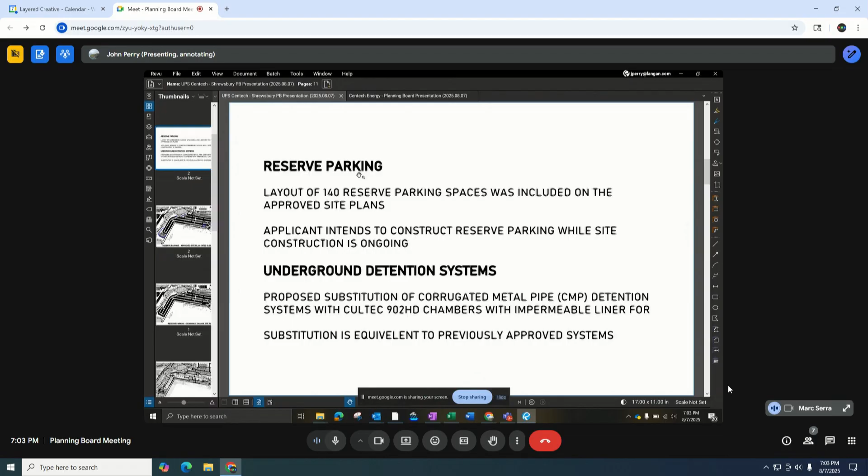If you recall, in the approved drawings from last October, dated October 25th, 2024, which are the approved drawings on record with the decision for the project, there were 140 total reserve parking spaces shown on the site plans. This is the employee parking for the site. We were originally proposing to construct 830 parking spaces, and we had 140 in reserve overall.

I don't have the breakout of what's just in Shrewsbury versus what's just in Grafton here, but shown here in blue is what we had in reserve, 140 total spaces. We're requesting to go ahead and build those now with the construction project that's occurring. There was at one point a plan to maybe just build those in the future, realizing that's going to be a lot more challenging once we have an occupied site with actual employees on site every day driving around the parking facility. So we're requesting to build those now.

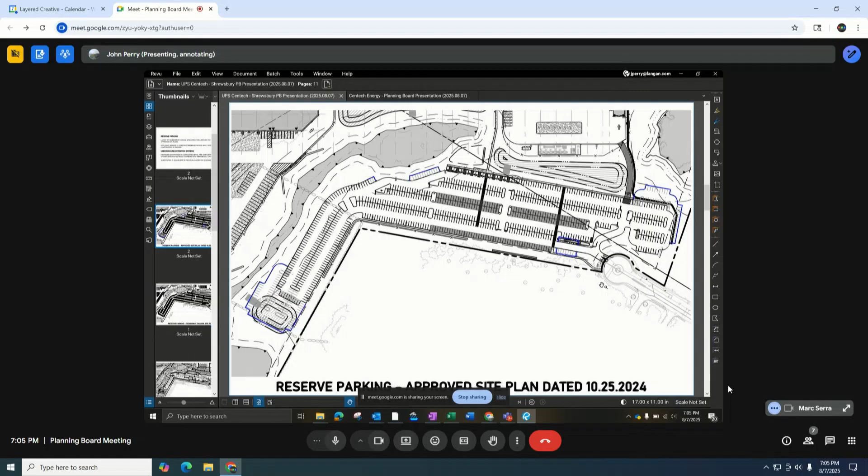Essentially what we've submitted is just the engineered drawings for this. As with our original submission, it was just the site layout for the reserve parking, not the final grading and construction detail. So on this next page here, that is the finalized site layout plan for the reserve parking. Really, in Shrewsbury, it's just these few in the top right corner here. There's a small retaining wall that we'll be installing based on the grading and everything.

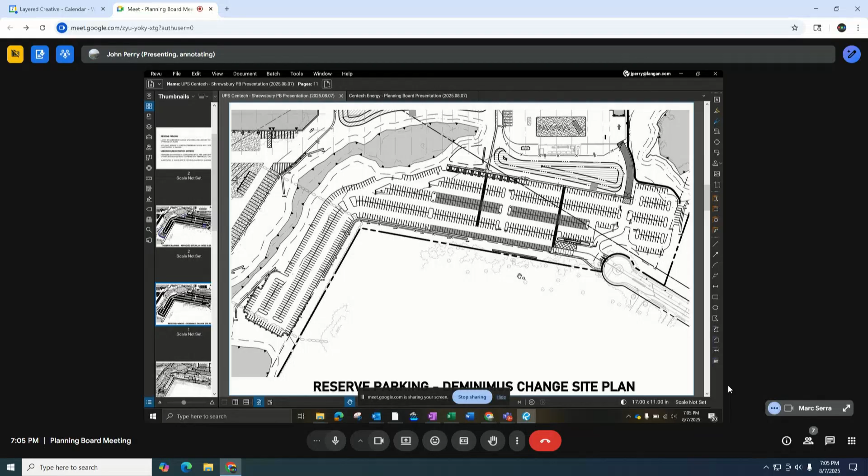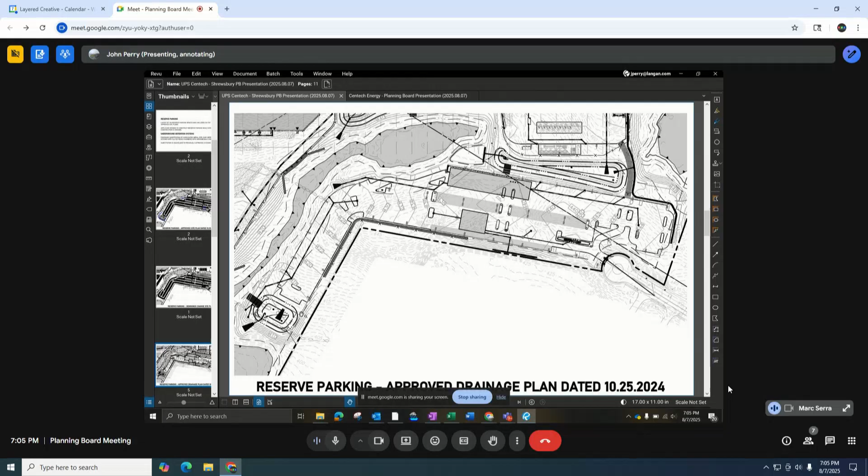Just to complete the picture here, and this is more Grafton, so more for context, in the southern portion we had a surface basin for stormwater. Now that we have parking over it, we're going underground with that detention or infiltration volume. That was all planned out in the original stormwater submission, reviewed and approved by Graves. Again, this is just the final detail for it. All of the impervious area was accounted for in our original design and stormwater plan, so there's really no change, just wanted to present this.

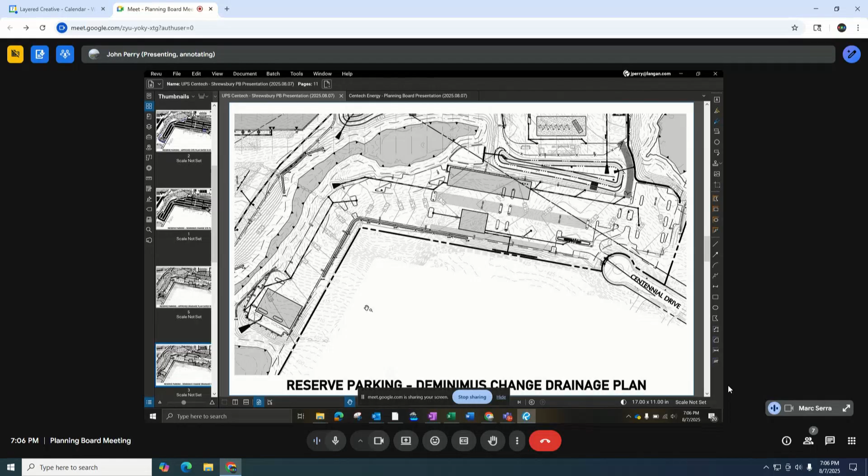I kind of refer to them as an updated plan set, essentially. The next thing is, this is obviously the warehouse area of the site.

We had 2 underground stormwater detention systems on the approved drawings, shown here in blue. Those were proposed to be 6-foot diameter solid wall pipe systems. They're not for infiltration, they're just to detain stormwater, to hold it back and slowly release it.

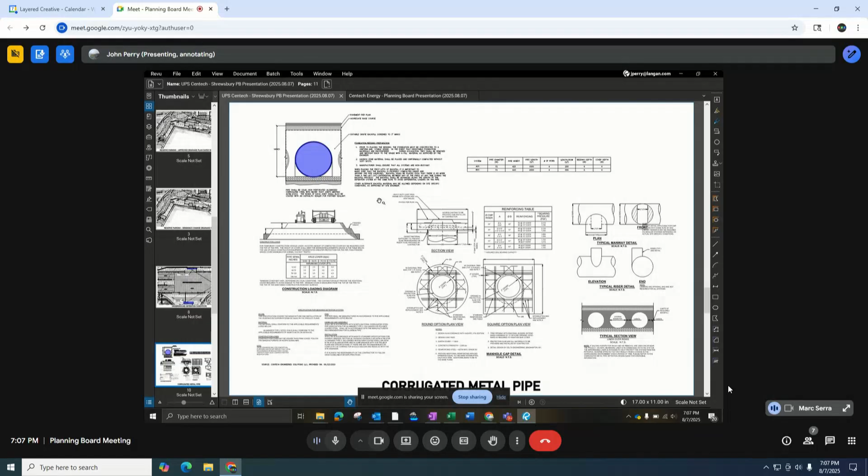What the contractor has proposed is just a slight variation of that. We're still proposing the exact same location, essentially the exact same volume, which will function the same way. It's just a different product. So this is what was detailed in our approved submission, just that 6-foot diameter solid wall pipe system, and this is the product that we are intending to use.

It is Cultec chambers. Apparently it's a little easier to procure, a little easier for them to install. I think they'll go a little quicker as well. Usually these are designed to infiltrate, but we don't want to infiltrate, so we're going to put a liner, a PVC membrane on the bottom, the sides, and over the top. So it's a completely wrapped impermeable system, so we can hold water in there.

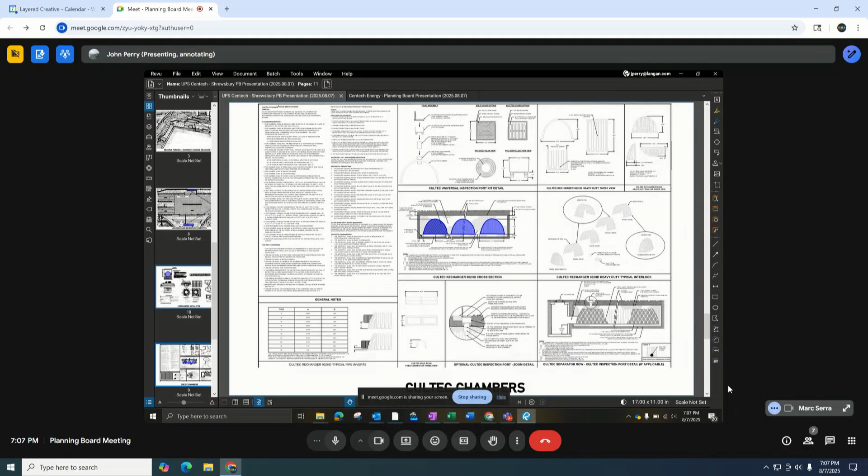Again, we've modeled it, rerun all of the stormwater calculations, and have proven that it's an equivalent system.

Is it equivalent for maintenance purposes as well? Do you think there'll be more maintenance, less maintenance, or the same for this system? There shouldn't be a whole lot of maintenance needed, because we're cleaning the stormwater well before it gets in there, but there will still be inspection ports and ports to vacuum or jet wash the units if needed.

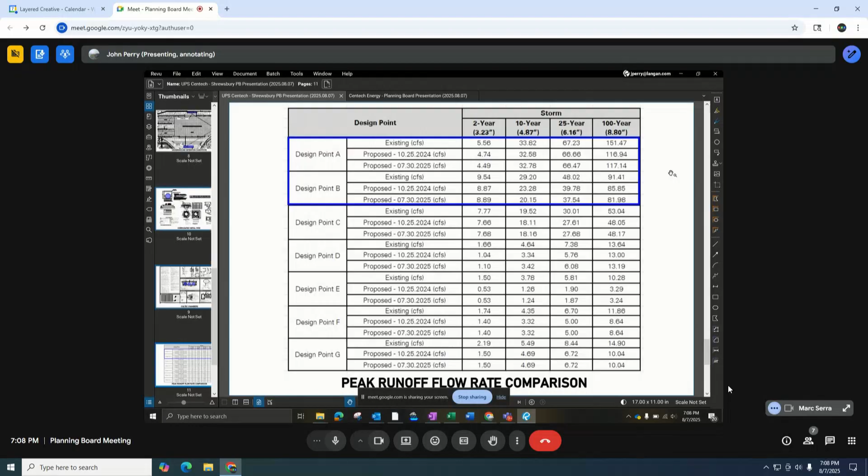Any board member questions or comments on these changes? Sure, quick question. So these 6-foot diameter pipes or storage areas, if they were originally designed not for infiltration purposes, I'm assuming that's for some type of temporary storage, and then they'll be transported or moved to some other location where there will be infiltration, right?

So the overall project has multiple infiltration surface basins, bioretention areas. In the employee parking lot, there are arch chambers that do infiltrate. These particular ones, we're getting all of our recharge and infiltration via all those other ponds and everything. You can see one of them here, the other ones are just off screen. These two in particular, we didn't want to infiltrate there because they're in areas of fill, and we just didn't want to introduce water. We didn't want to saturate the fill or create hydrostatic pressure issues with retaining walls and things like that. So we try to keep our infiltration more in the natural existing grade areas of the site.

If you don't want the infiltration from these devices, why go for something that was designed for infiltration and then add an additional plastic membrane to close up that infiltration aspect? Why can't you go with something that originally was not designed for infiltration purposes? The bottom line is, if it was designed originally for that purpose, why create a situation where if the liner leaks, it may be infiltrating? Not that it's going to cause any major problem, but just trying to understand that part of it.

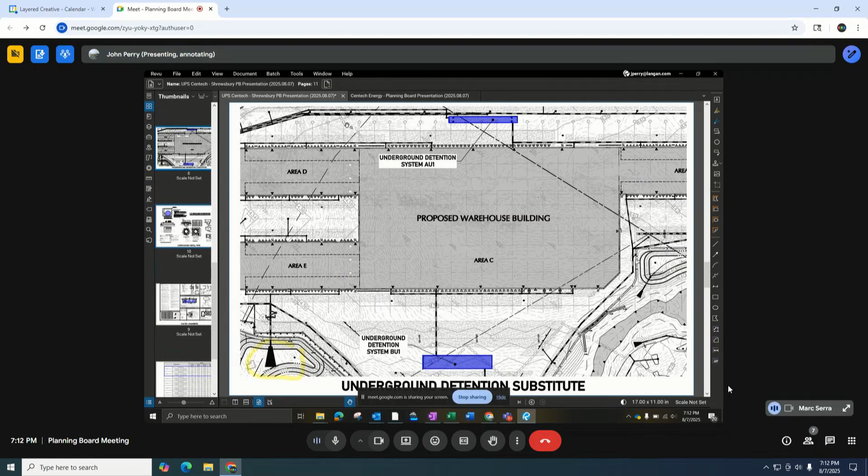Any other member questions or comments? I don't have any questions. No? Okay. Chris, do you have anything from the town's perspective?

Okay, so I think we need to entertain a motion on this de minimis change request. I move that we consider the proposed parking and detention system modification as a de minimis change. Is there a second? Second. All in favor? Aye. Okay, great, thank you.

Next item on the agenda is the proposed common drive special permit for 29 Hill Street. They have requested a continuance to our next meeting, which is Thursday, September 4th. Is there a motion to continue? Move to continue to September 4th. Is there a second? Second. All those in favor? Aye. Excellent, okay. Next up, the proposed battery storage facility site plan approval from Polito Development Corporation.

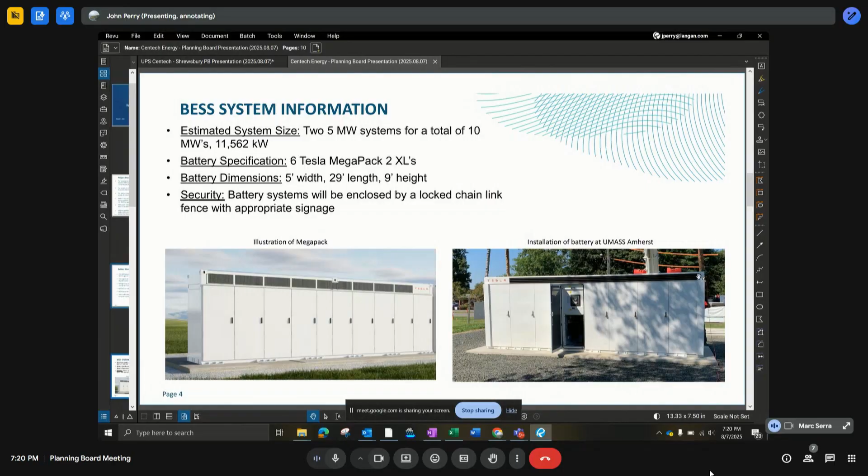As you can see on the site plan that John will review with you, it's surrounded by a chain link fence that's locked with appropriate signage. I've also included in the presentation an illustration of the Tesla Megapack and an illustration of a battery we installed at UMass Amherst. With that, unless you have questions, I'll ask John to discuss the battery site plan.

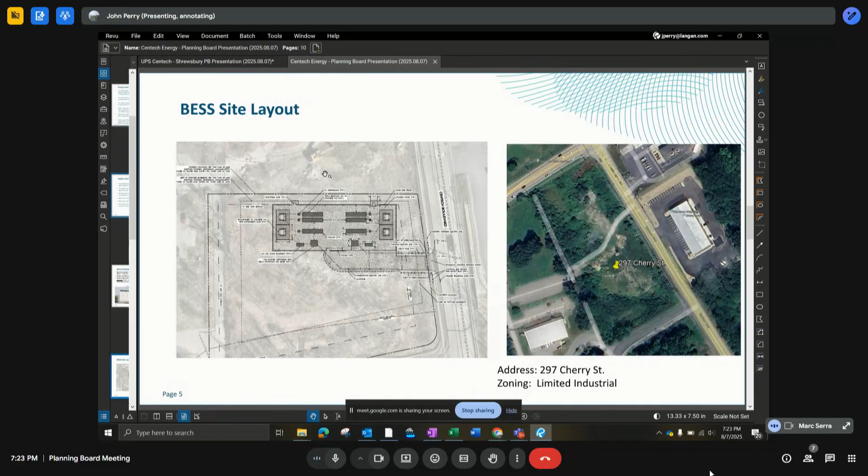We're actually proposing it a little bit more southern here. There is some existing vegetation, and we're proposing to leave as much as we can to get that curb cut in there. But also we want to try to screen the batteries from the view as you're driving down Centech Boulevard. So we've proposed 5 evergreen type trees there — a couple of eastern red cedars and some white pines.

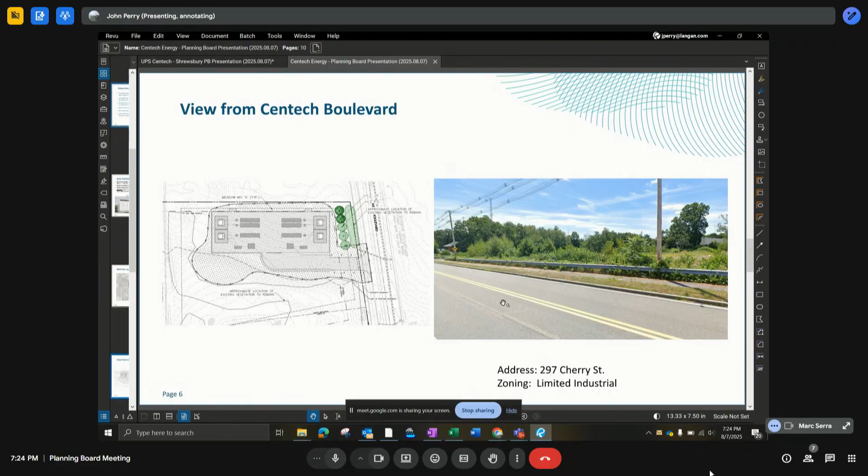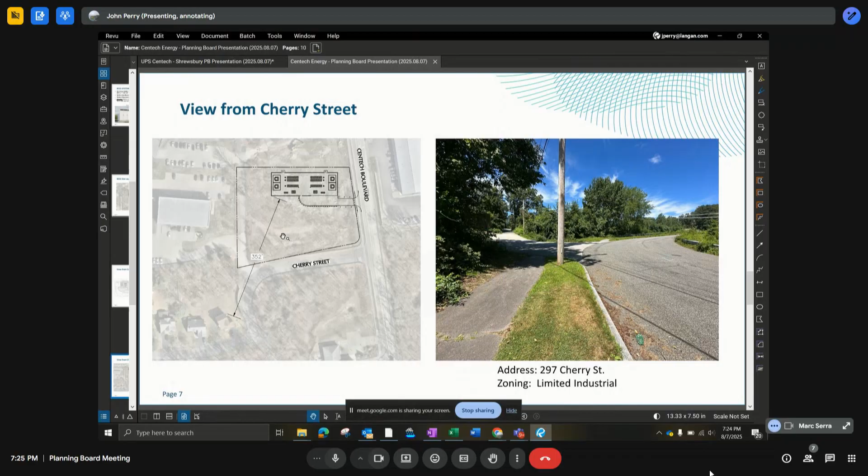As you can see, the battery storage facility is strategically tucked toward the northern portion of this site, keeping it as far away from Cherry Street as possible and maintaining that vegetation. We're about 300 — this shows 352 feet from the nearest house, that's the corner of the fence. It's really about 400 feet to the battery itself.

Just to touch on stormwater, we discussed this with Graves Engineering, and they've issued a peer review letter stating that we've met all of the applicable stormwater standards. We took a bit of a holistic approach to the stormwater model — we didn't just analyze our half of the overall site, because the topography does go northerly to southerly.

We also went back a few years to look at existing conditions, because there used to be houses and barns on that site. Graves had suggested we look at a more historical, pre-existing condition to model our existing stormwater flows. So we went back to about 2007 or so, before there was demolition on the site.

Total model area was about 4.5 acres. There was just over an acre of impervious area previously. It flows from a northerly to southerly direction, and discharges to the street in this area, where it would overflow and continue on.

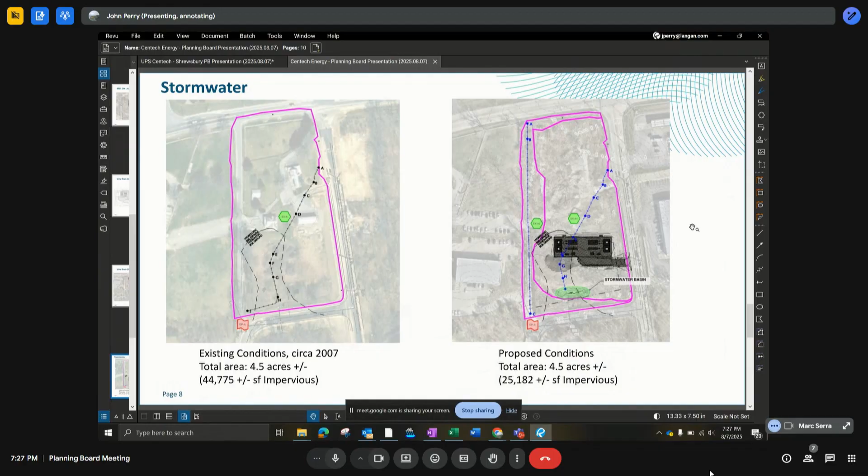Okay, so I'm going to pass it over to David now. I'm going to stand up, I think it's better.

Thanks for your time, my name's David Rains. I'm Senior Director of Health and Safety for RWE. I've been in renewables about 12 years, but my claim to fame is I've been in the fire service for 40 years. I'm currently the Chief of Special Operations about 40 miles north of New York City, running the hazmat team, technical rescue, and so on. I'm a fire protection engineer by training.

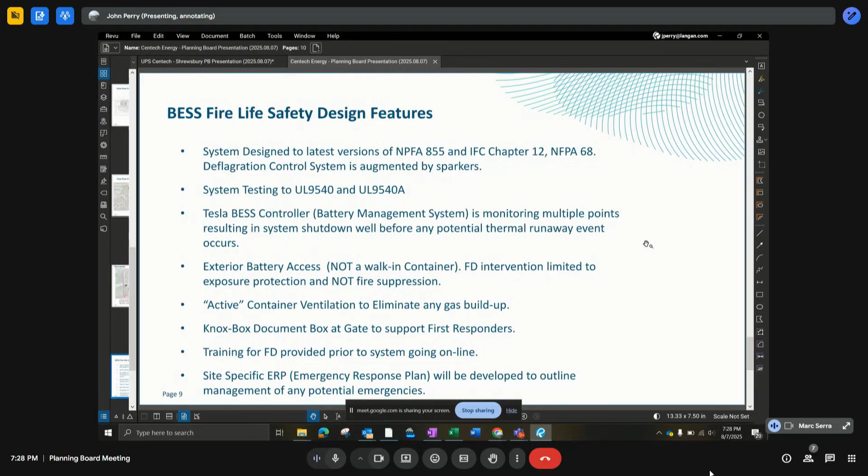Before I get into the bullet points, I want to talk about the batteries a little bit. The batteries proposed here are Tesla Megapacks. Why is that important? These are the newest generation batteries, and Tesla, and the industry as a whole, have removed the cobalts and manganese and some of the nastier metals that were originally part of lithium ion batteries. So these are lithium iron phosphate batteries, very efficient and very stable.

Without those ferrous metals, the chemistry is very different. Back in the day, say 10 years ago, these batteries ignited at very low temperatures. If they went into thermal runaway from any kind of failure, they ignited at about 200 degrees Fahrenheit, which isn't much considering we build these things in Nevada where it's 120 degrees on the ground on a good day.

Now with this chemistry, very, very stable. In a lab setting, it takes about 1,200 degrees Fahrenheit to ignite them with a torch. The design criteria says they ignite between 700 and 800 degrees if there's a failure. Now, of the thousands we have out there, we've had no failures, because these things have battery management systems and thermal management systems.

The systems we've seen fail in California and other places are 7 to 10 years old and don't have those battery management and thermal management systems. They're racks of batteries charging and discharging, and when they fail, they fail. With these, we're monitoring 14 points on each battery, including temperature, discharge, charge, resistance, battery health, and each individual cell. If there's an anomaly, it shuts down automatically and sends a notification to our techs.